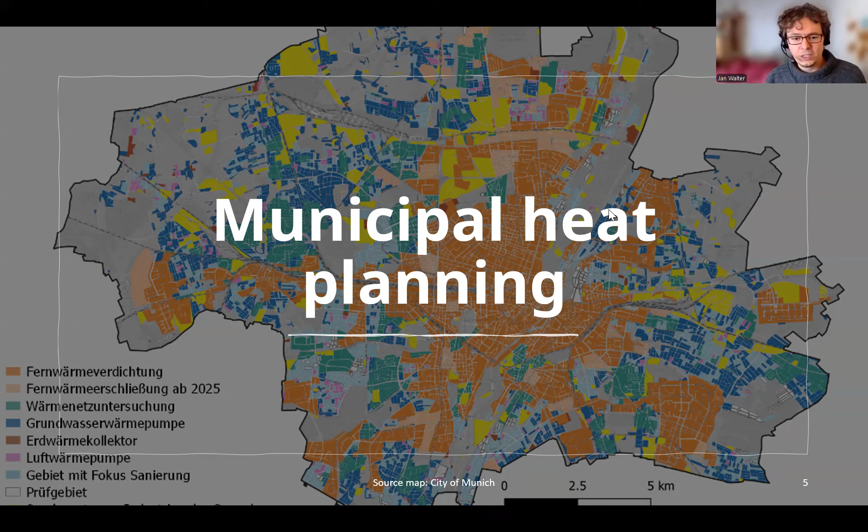And so I want to start with that, and I want to give kind of two advices, so to say, for this municipality. A big advice is: look at the situation in your municipality, look very closely at it, do municipal heat planning. So I will talk a little bit on that. And then afterwards, a bit less because 10 minutes are short, on the question of: okay, we don't even have DHC here yet, but we will need it, so who could be the operator for us?

So I'll just head in with the issue of municipal heat planning. And there we see it's a planning where the aim is really a master planning for the whole municipality, concerning the whole issues of heating and cooling. And the municipality is the main actor here. It's really the decision maker. But there are many stakeholders that need to be involved, of course.

And the main results are spatial data, potentials, renewable potentials. How can we do the change from fossils to renewables? And then we really look, spatially resolved, in the areas of the municipality, and we look at the overall suitability of central or decentral supply. So here we will also see: do we need DHC? Because central supply in the end will be DHC, because we don't really have any other options. Don't want to go into that right now.

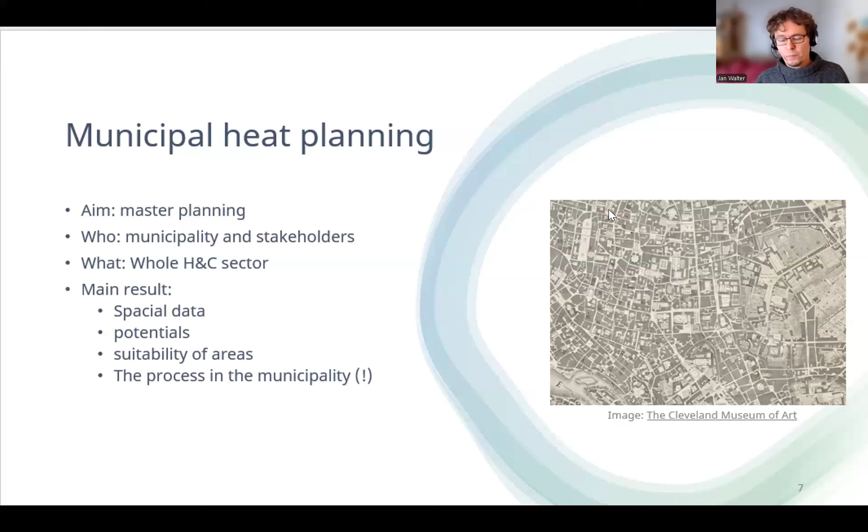So I put one more point here, which to me is really important. In municipal heat planning, the municipality needs to really start a process where all people who need to be involved get involved, internal and external to the municipality, and they really get a common picture of what they want to do. So apart from the analytical data, this to me is a very, very crucial point. And often this point is forgotten in municipal heat planning, or not forgotten, but not given the importance it needs. So I will just quickly go through the 4 different steps of municipal heat planning.

So the first step is to look at what is there. So inventory analysis, looking at the starting situation. You look at what quality the buildings have energetically. Do we have gas or not? What infrastructure do we have? Do we have some little DHC here or there? And the second step is to look at what's really the potential of renewable energies. And this step is analytically the same step for each municipality. And perhaps I need to say that in almost all cases, a municipality needs an external partner who helps the municipality get the data together, analyze the data and everything. So that's important to have a partner here.

But then in this second step, for each municipality, the outcome is really very different. Like in one municipality, you have perhaps a big sea, or you don't have any water. In other municipalities, you have other situations. So you will have very, very different outcomes. What are the potentials in your municipality?

And third, that's in a way new to many, because you take kind of a target picture. So you don't say, okay, the next steps will be this. You do that also, but you really look from the final situation you want to reach. For example, in Germany, the government says by 2045 at the latest, you should be 100% renewable. So the final picture will be 2045, if the municipality doesn't have an earlier date. And then you see how you can get with all your potentials to the target picture, 100% renewable. And then you do kind of a backcasting. You look from there backwards. You say, okay, what will I have to have reached 5 years earlier, 10 years earlier, and so on till today?

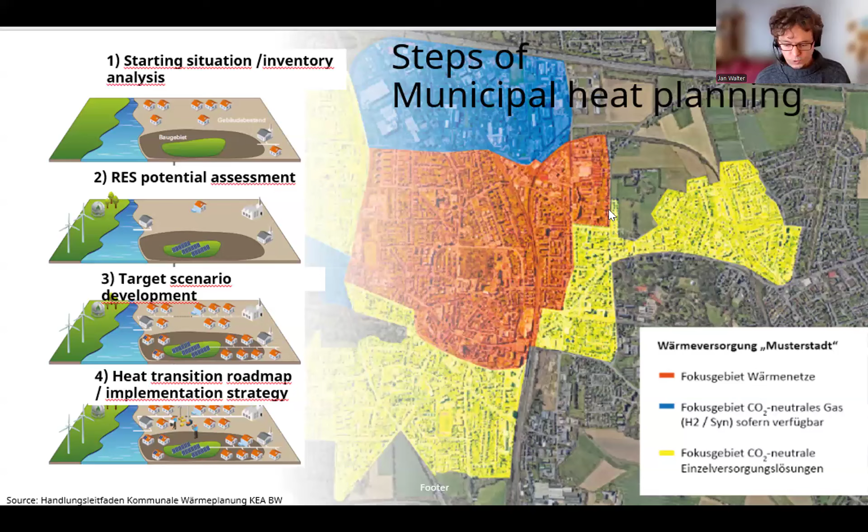And then, of course, the measures you develop out of it: the sooner ones you look at more and more exactly, but for the later measures, you also say, okay, we need this, this, this. And by that, we are at step number 4, with the heat transition roadmap or the implementation strategy, because then we say, okay, we have a roadmap now. We now have an idea where to go, which steps to take to finally manage this really complicated and important issue. Okay, more on that, of course, when we have the discussion part.

A bit shorter, I will say some words on finding an operator, and I have some more slides you can get afterwards on that issue. So in the beginning, it's important to say there are many different options. Since you don't have any operator yet, you will have the possibility to really think a bit on it. What's your way to do it? So there are municipal-owned operators. There are non-profit type company operators. Like in Denmark, that's the law: every company is non-profit type, but in Germany, for example, it's all over the place, different.

Like, there are some cooperatives in Germany doing it. And then of course there are many private profit-oriented energy utilities. And there can be good reason to choose this option if you find someone who does it. And of course, there are mixed types like public-private partnership or a cooperative where the municipality, for example, is one important member. And all the different types you may choose have different pros and cons. For example, a municipality-owned operator can get cheap money from the banks.

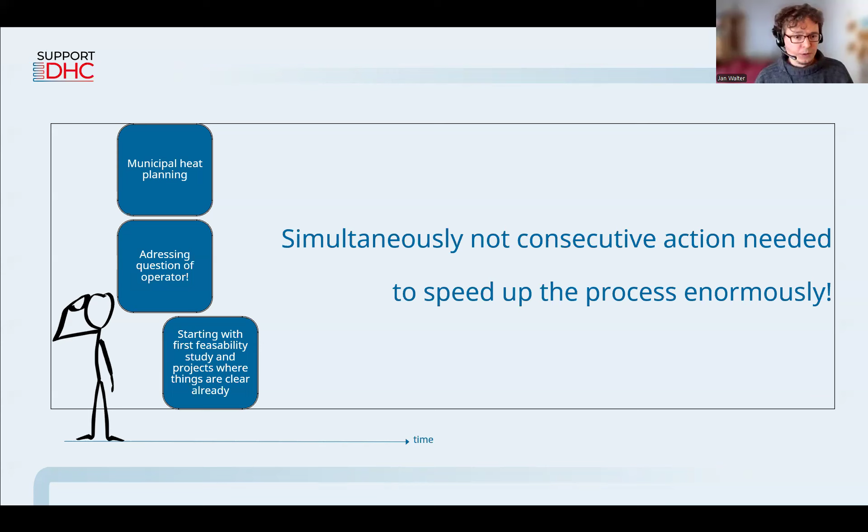Even in the beginning, you have more or less the same possibilities to think about which operator is the right one. So go for this in the beginning, not afterwards. Just start with it. And once this is clearer, depending on the municipality, how clear it needs to be and whether the operator needs to be there already can be a bit different, but then you can already go for the first feasibility study to speed up the process really enormously.

So, already in the summary: it's a really good idea to get into the issue of municipal heat planning, to really get the possibility as a municipality to steer the heat transition from fossils to renewables. Yes, it is quite a big job. I can understand if you are hesitant or even afraid. But still, I don't know anybody else who can do it. The municipality is really needed for the job, because no one else really stands for all the people living in your municipality but the municipality itself. So I would really encourage the municipality to go for that issue.

And the good news is that there are many positive economic and social effects we can study in places where the heat transition, often with DHC, is really going on. There are regional value creation effects which keep the money in the region, which is really good. And socially, it can bind people together. So the issue of DHC should be actively taken on board and steered by the municipality. And there's no one right way of building up DHC. There's no right or wrong kind of operator, but there are many right ways, and it's important to look at it and think about what is my right way.

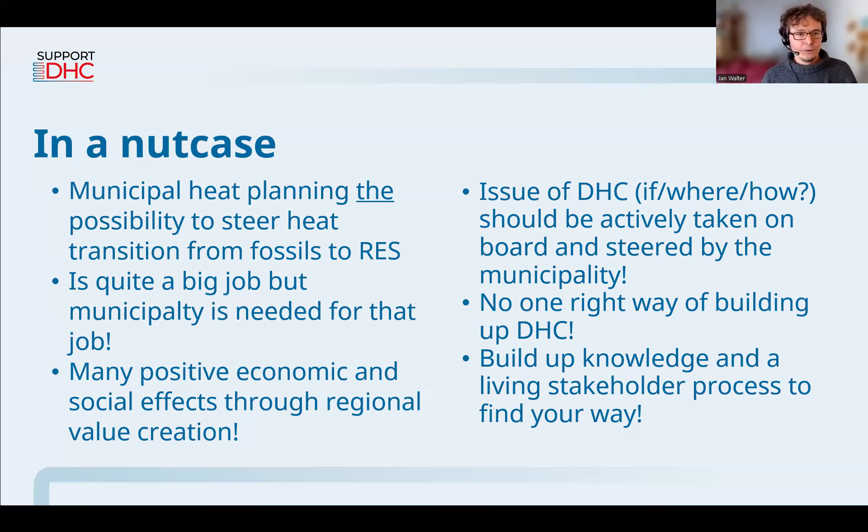And once a city knows how to organize district heating and cooling, the next question could be what kind of system to build. And therefore, we will jump into the next presentation, and we will hear from our second speaker, Henrik Gadd, who has been a senior lecturer in energy technology at Halmstad University since 2020. He previously spent 14 years working in various district heating and energy system roles, and he holds a PhD in energy science from Lund University. And today, Henrik will explain the benefits and constraints of low-temperature district heating and why starting with low temperatures from the beginning makes the later integration of renewables and waste heat much easier. So please, Henrik, the floor is yours.

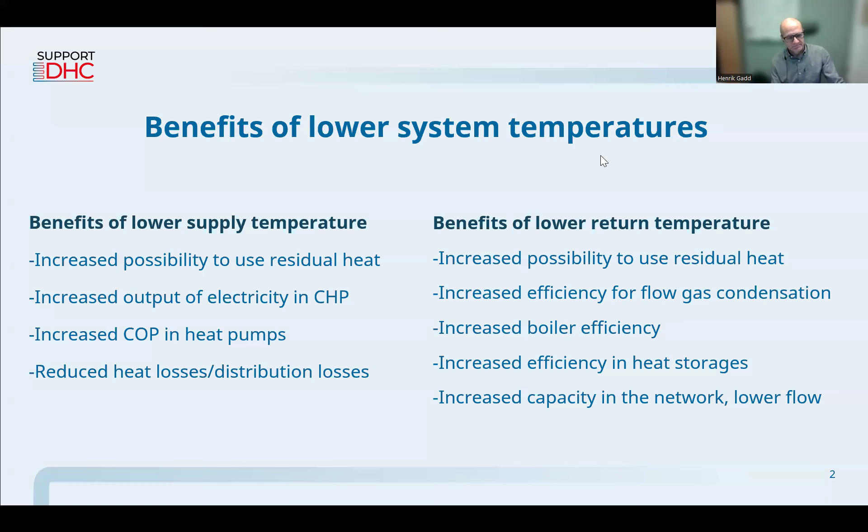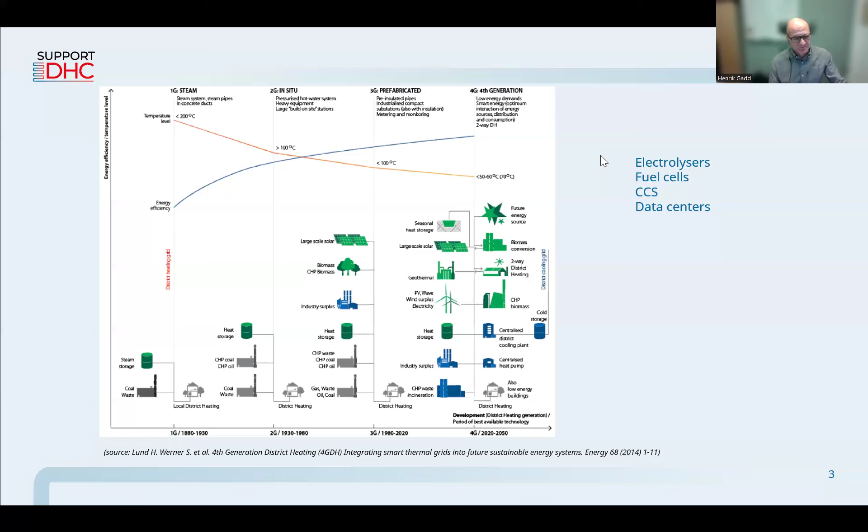But as Jan said, I always click on this wrong. It's not always very easy to implement, so I will show you two implementations, two projects where I have participated, to show that this is really doable. It's not difficult. It might seem difficult, but it's not.

This is Brunnshög in Lund, a city in the south of Sweden, where they built an entire new part of the city. They had access to heat from two research facilities, MAX IV and ESS. They are particle accelerators that belong to the university in Lund. And they have a lot of low-grade heat. So they decided to build a network in this part as a low-temperature district heating system.

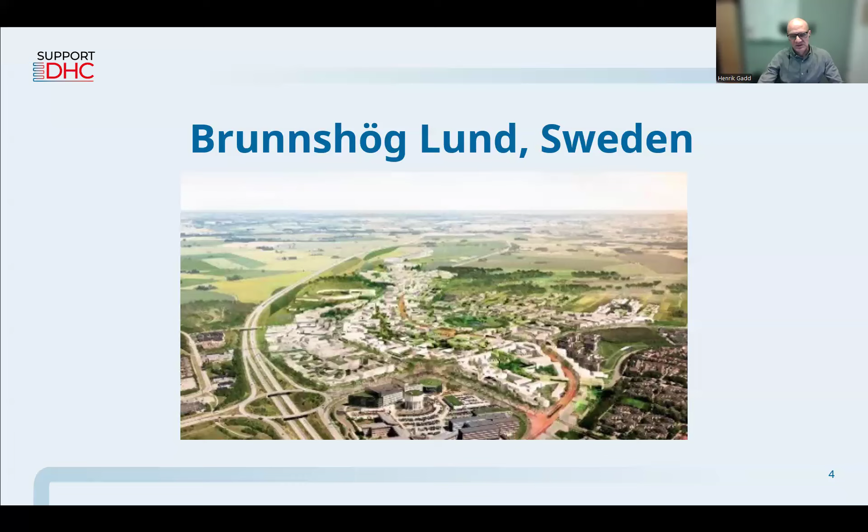And this is one of the buildings that was part of this project, called Xplorion, and we introduced a district heating substation in each flat. It was called a 3-pipe system, which means that each flat is supplied by 3 pipes: heating supply, heating return, and domestic cold water, and then you have a heat exchanger for domestic hot water in each flat. Normally you have a pipe with domestic hot water and also domestic hot water return to keep the domestic hot water hot in the entire circuit.

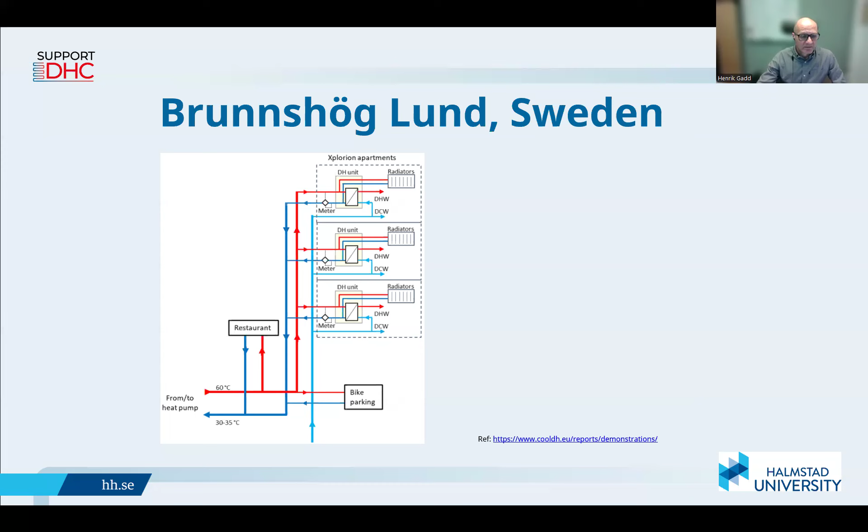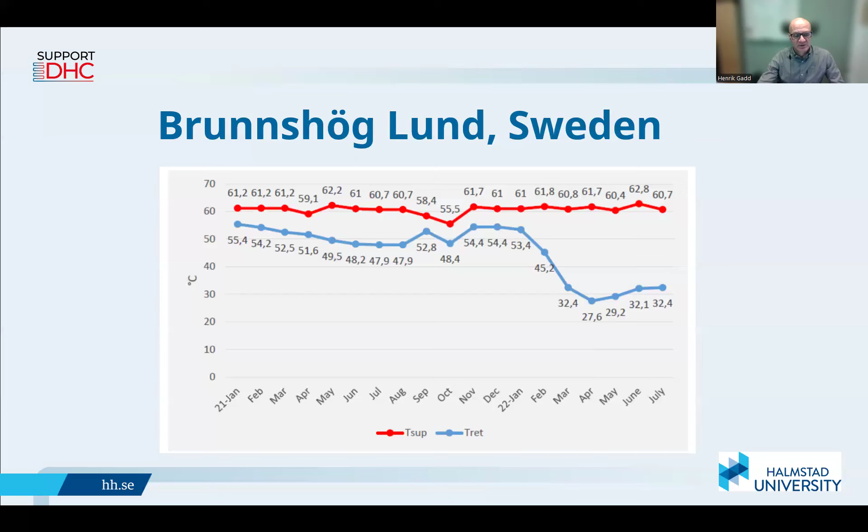But then we went into each flat to make a very simple adjustment for the domestic hot water heat exchanger, and we got the return temperature down to below 30 degrees. I think it took like 5-10 minutes in each flat. The problem, though, was that the substations were only accessible from inside the flats. We had to go into each flat. That was time consuming.

But then there is also circulation to keep the service pipe and the network hot during the summer period when there are no heating demands, so that you can have a return temperature of about 25 degrees. And we are at the later part of the testing period right now, and we will reach perhaps not 25, but at least under 27 degrees for in total 55 buildings.

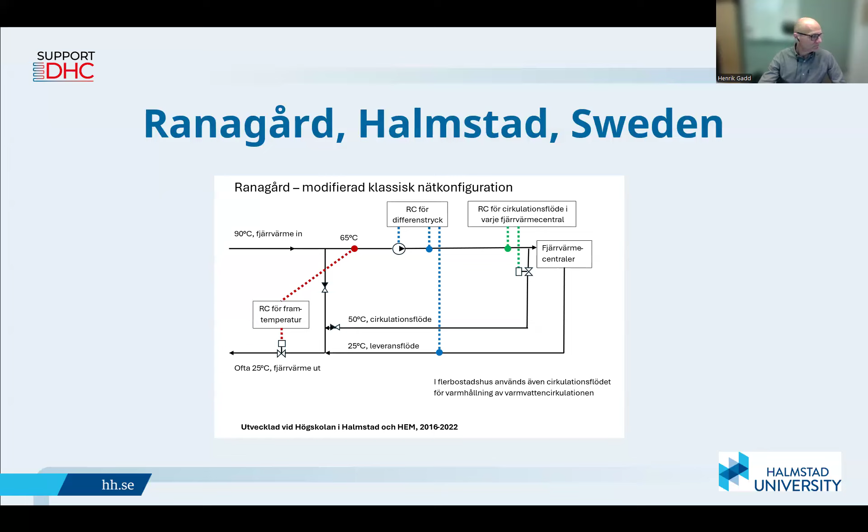Well, I think most of you know that Sweden is quite mature when it comes to district heating. We have a large penetration of district heating. About 60% of all building heating is from district heating. But that doesn't mean that these kinds of systems don't exist in other countries. I have two examples. They come from a report, you can find the link here, that we wrote. We finished it last year, where there are about 70 different possibilities for new district heating.

And one is here from France, where you have a district heating system based on geothermal, where there are actually four different supply temperatures. So the return temperature from one building can be the supply temperature for another building. And you can see that temperature levels are all very low, and some are really, really low. And the total return temperature is 32 degrees. That I right now think is a bit high, since we reach like 25, 27.

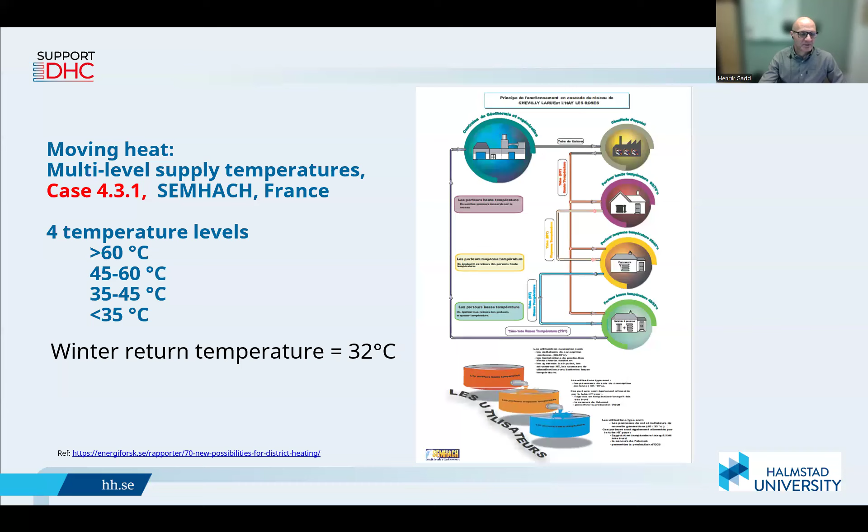And we also have from this report a building in Frankfurt that was just finished, I think in the latest years. And they have the same solution that we had in Lund, with a three-pipe system for 400 flats with their own substations. Sometimes I think that people think that fourth generation district heating is something for the future, but it's not. It's here, and it's in operation, and it's possible to go and visit and look for yourself that it works.

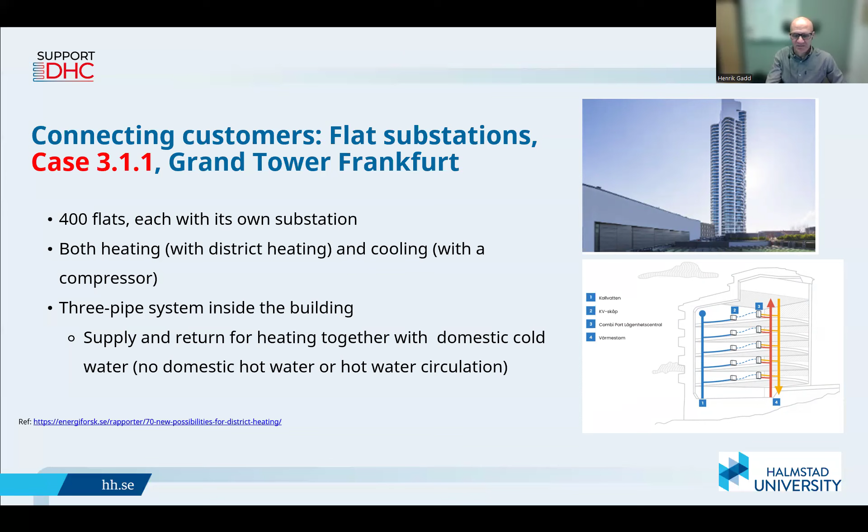But I have learned some lessons from both these sites in Lund and in Halmstad. We can see that there were clear instructions of how it should be done and everything. But there are a lot of people involved in different organizations. So I think the district heating operator must be involved in the process all the way from design to commissioning. Also with subcontractors, consultants, everybody that is involved, because people tend to do as they did the last time. And if they didn't build fourth generation district heating, they will build third generation district heating.

When we have high temperatures, we have a higher acceptance for faults or for settings that are not correct. So it's very important when you have these systems that you follow up the operation of the customers. And that means also that you need to have access to the settings in the building. You don't need it by yourself, but you can have it through the house owners, technicians or whatever. That is very common anyway in Sweden, but I think you have to be more active when it comes to how the buildings are operated.

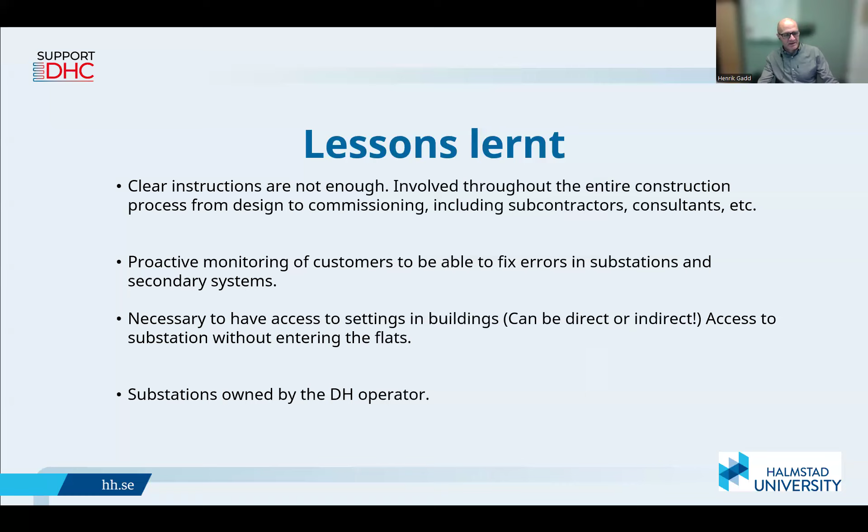Thank you so much, Henrik, for your presentation, and also for including these practical examples. It's always good to hear about some real case studies. We will now continue with the third topic, because even with the right organization and right technical concept, financing remains one of the biggest barriers for emerging markets. For that reason, Gabriele will cover EU and national funding opportunities, public-private partnerships, and de-risking mechanisms.

Gabriele Pesce is Director of Innovation and Sustainable Finance at Euroheat and Power. He has a background in international relations and diplomatic studies, and extensive experience with EU-funded projects and tenders. At Euroheat and Power, he leads activities related to funding, grants, and access to finance, and he also supports policy work on European sustainable finance and infrastructure legislation relevant to district heating and cooling. So, Gabriele, the floor is yours.

Thank you very much, Laura, for this nice introduction, and good morning, everyone. As Laura already mentioned, I'll try in 10 minutes to give you an overview and a list of the main financing options we have to start from scratch, or even to expand or refurbish a district heating and cooling system. We know it's quite a big challenge.

So let's see if it works. Okay, yeah, sorry. Okay, perfect.

So probably something that you know really by heart. Heating and cooling is the largest share of Europe's final energy demand. But the penetration of district heating and cooling is still far below what is recommended for 2050. The goal is to get at least 55% district heating share by 2050 in the heating and cooling sector in Europe. Today, we are on average at a fraction of that. So scaling up district heating and cooling is not optional if we want to decarbonize the heating sector; it's a structural requirement for Europe's energy transition.

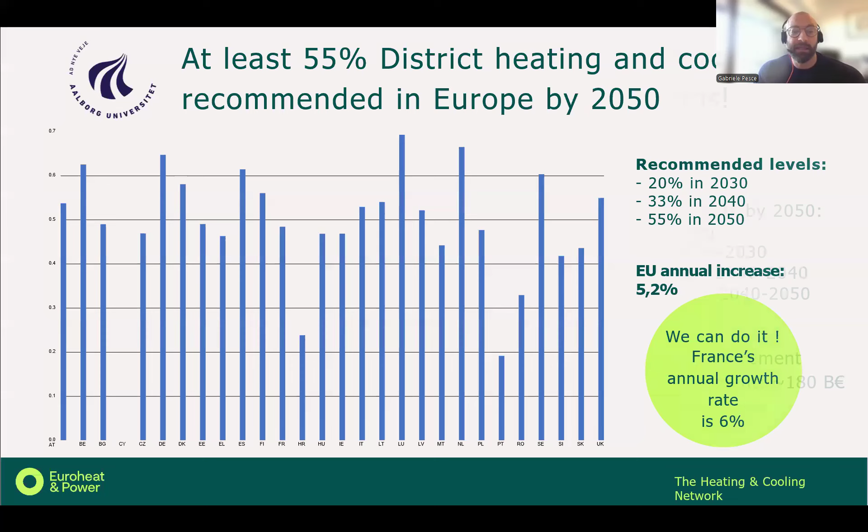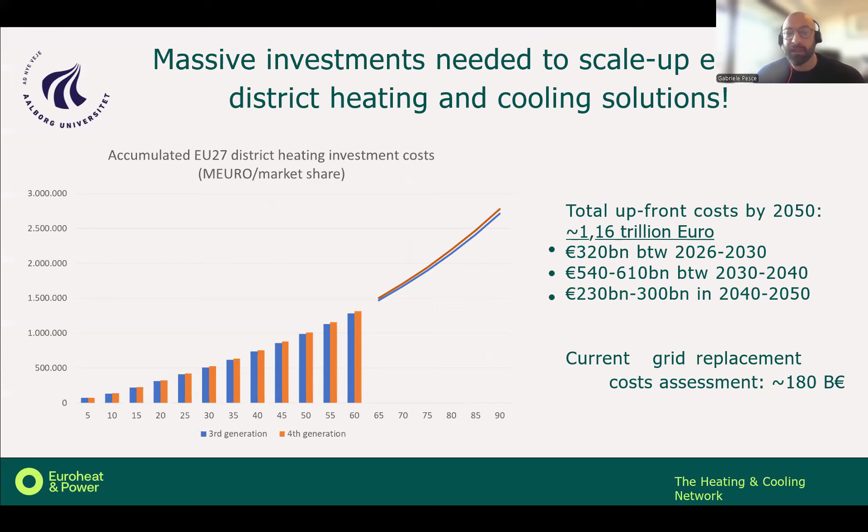Reaching this scale requires massive upfront capital. It's calculated that we need about 1.16 trillion by 2050. The costs are not evenly distributed, and we see very capital-intensive phases between 2026 and 2040, when most of the network expansion and construction will take place. My message here is that these investments are long-term, infrastructure type, with payback periods that often exceed 20 years. So this makes financing absolutely central.

The good news is that member states are not starting from zero. Countries like France, Denmark, Netherlands, Germany, Scotland, and many others have already announced large national support schemes. Many are accelerating household connection, others are focusing on replacing fossil-based heat with renewable and waste heat. But commitments alone are not enough. We need robust financing models behind every new system. So we're going to see what we have.

According to a recent study, despite progress, there is still a mismatch between available instruments and actual needs. Most European and national instruments focus on innovation or energy supply, but district heating sits at the intersection of infrastructure, energy, buildings, and municipal planning. This makes it dependent on instruments that are not always tailored for its complexity.

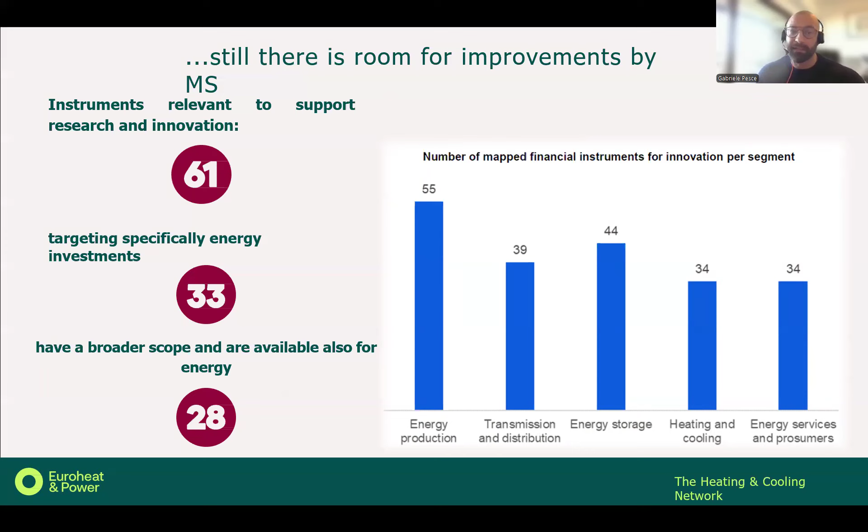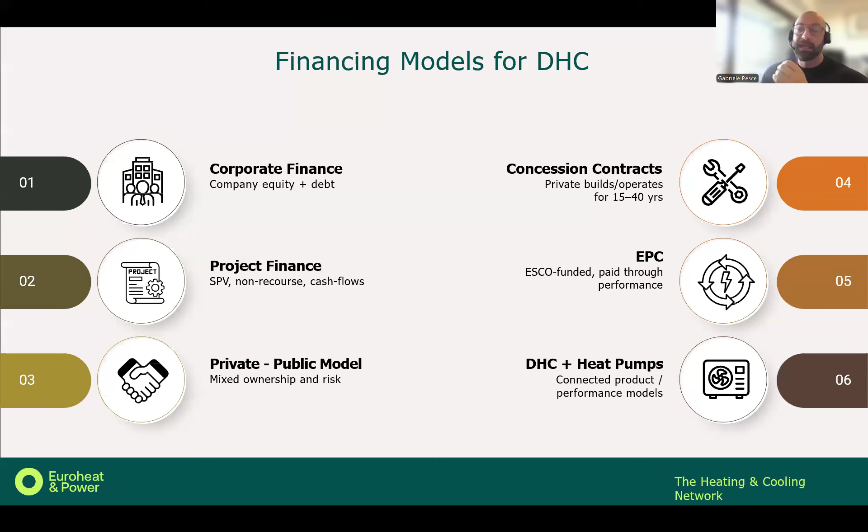So just to summarize, the message here is simple. We have many financing models, but the real challenge is choosing the right mix for each project. As I said, there's no one solution for everything.

Maybe another very important message is that finance is the real bottleneck for district heating and cooling projects, not the technology. If we look at district heating today, the technical solutions are not the problem. We know how to recover waste heat, how to integrate renewables, how to build low temperature networks, and how to electrify heat efficiently. The real bottleneck is financing, or more precisely, the mismatch between what the sector needs and how current financing frameworks operate.

So district heating and cooling projects are capital intensive, long-lived infrastructure that delivers system-level benefits: lower gas demand, higher energy security, integration of renewables. But these benefits sometimes aren't monetized properly in today's investment logic. At the same time, investors face a fragmented regulatory landscape, limited standardization, and long permitting procedures. So what is the result? Quite simple. The sector is investable, but only a minority of projects manage to reach financial close.

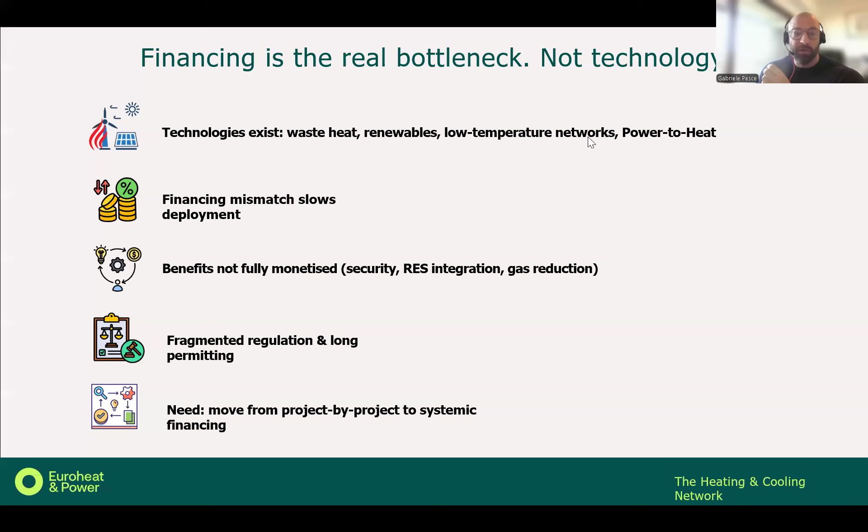If we want to reach, let's say, the recommended 20% market share by 2030 and the 55% by 2050, we need to shift financing from project by project to a more systemic, scalable, and predictable model. And that requires a much stronger alignment between public and private finance. So let's see which is the role, in my opinion, of public finance. Public finance has a very clear mission, not to replace private capital, but to make private capital possible. And that's a fundamental distinction.

The first role is providing targeted grants. These are essential for parts of the network that will never generate a fully cost-reflective return. For example, new distribution pipelines in low-density areas, or the switch from fossil boilers to renewable and waste heat. These transitions are necessary, but the business case alone sometimes wouldn't cover them.

So the second role of public finance is risk sharing. Guarantees, first-loss tranches, insurance mechanisms, or off-take guarantees can dramatically reduce the perceived risk of a project. They lower the cost of capital and make institutional investors more willing to participate. Without these tools, many projects remain technically viable, but financially unattractive.

And the third role is to support early stage development. This is very important. This is one of the biggest blind spots in this heating and cooling world. Before you even build a meter of pipeline, you need permitting, feasibility studies, engineering, environmental assessment, coordination with industry, connection strategy. All these cost money. And it's often money that municipalities don't have. So projects die before they are even born.

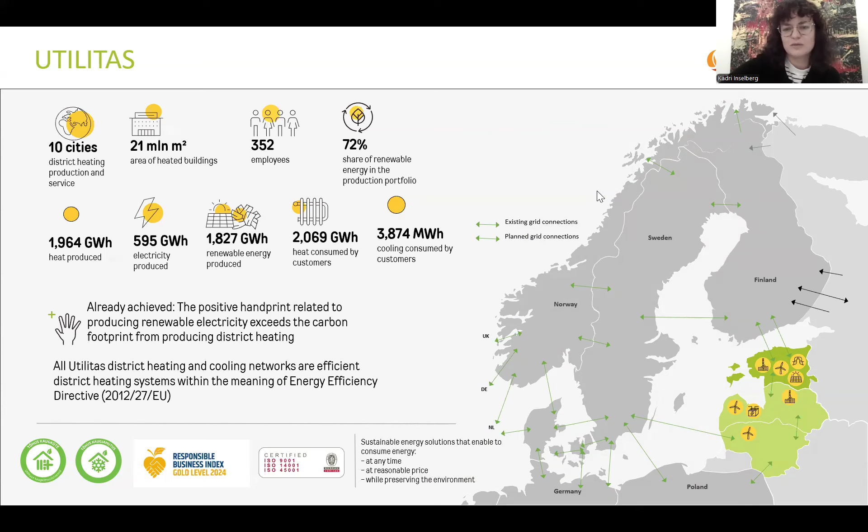I'm from Estonia, so Estonia has had district heating for over 70 years. My company is Utilitas. It's a privately owned company. We offer district heating services in 10 cities, nine in Estonia and one in Latvia. And we also are very active in green electricity production, also in all of the Baltic states. But basically, district heating started in Tallinn 70 years ago, and it was not a voluntary process. So there was no democracy, and there were no media campaigns, I'm quite sure. But nowadays, district heating has really changed.

We do have district heating areas in place in the cities. So basically, if you are building a new house or you are choosing the heating system, you have to choose district heating if you don't have any better solution efficiency-wise. And so basically nowadays, district heating is not a monopoly anymore. We do have heat pump systems, which can be chosen, and we have to compete nowadays for every new house. And after the energy crisis, we have been expanding our networks, and each year more than 100 new buildings are connected to the grid. So we are really expanding the grids and also adding new buildings.

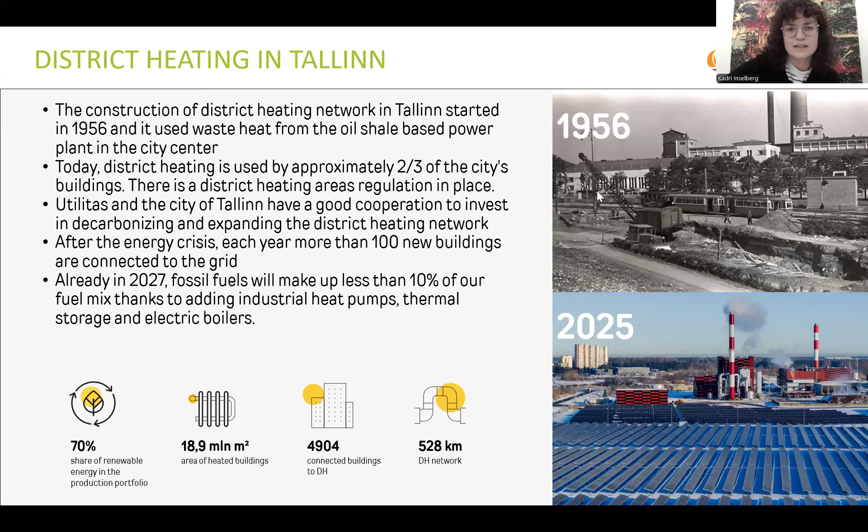I think basically, how do you speak about district heating? We have had it for 70 years, but a lot of people have forgotten it even existed because it's an invisible service, so to say. If you ask people living in big houses, they don't even know how their buildings are heated because there are no particular problems. The water is warm, the rooms are hot, so they don't really care. So as we have competition, so to say, and we have a good regulation in place which we want to keep, we feel the need to communicate and speak about district heating.

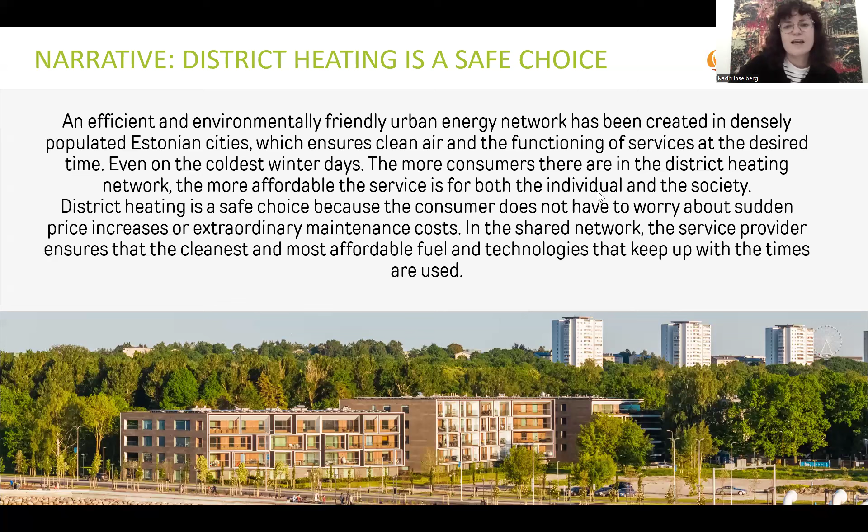And we say it's efficient and environmentally friendly, and it's the best urban energy, basically in densely populated cities. And it works on the coldest of days, and regarding affordability, it is important to say that the more consumers there are in the district heating network, the more affordable the service is, both for the individual and the society. So yeah, we basically say it's a safe choice.

And three headline messages are that district heating is convenient and safe, because it ensures clean air, it's always there, and it's very safe because the heat is not produced in the building. So district heating is affordable.

I know for the new markets, this might be a tricky one, as we already have a lot of clients. Of course, the prices are stable, but for example, I would assume that if I wanted to start a new district heating area, I would say that, okay, the price in the beginning is this, but if we have, I don't know, 200 buildings, then the price will be this, or if we have thousands, then the price would be this. So it's very important to speak about the scalability and the shared network.

So in Estonia, the price has been very stable, and it was very visible during the energy crisis, where district heating prices, of course, also rose, but they were more stable than the alternatives. And the price of district heating is regulated in Estonia, so it's strictly cost-based. And over the past decade, district heating using clean energy has become more affordable, actually, as the cost of district heating has increased less than people's incomes and the general price level. And of course, there are low additional costs.